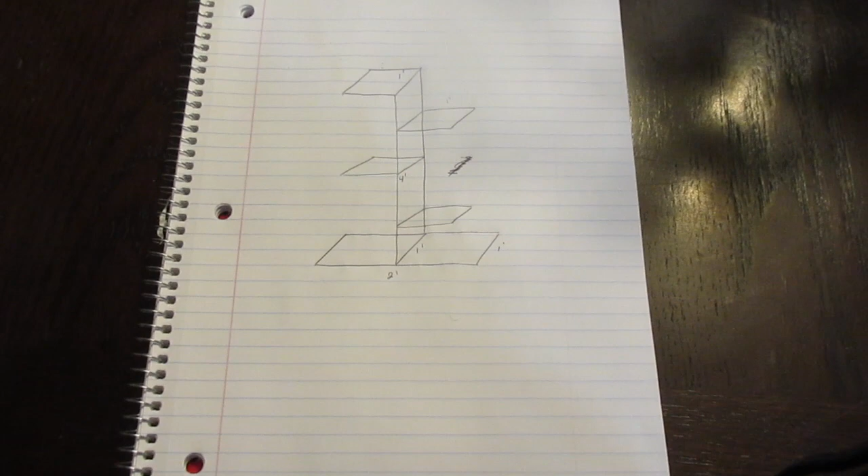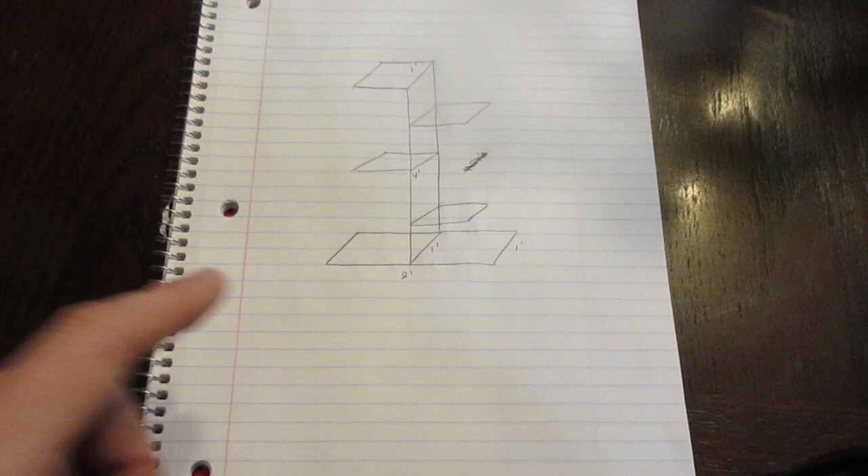But what we are going to do today is make a planter stand. Now I have some 1-inch tubing, 1-inch angle, and some cedar - I believe it's 8 feet. It's a 1x12 that's 8 feet long. So hopefully between all that, we should have enough of what we need.

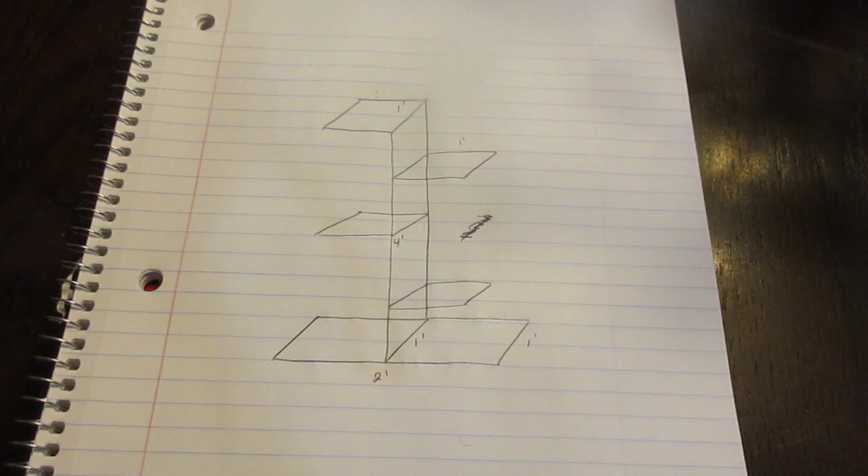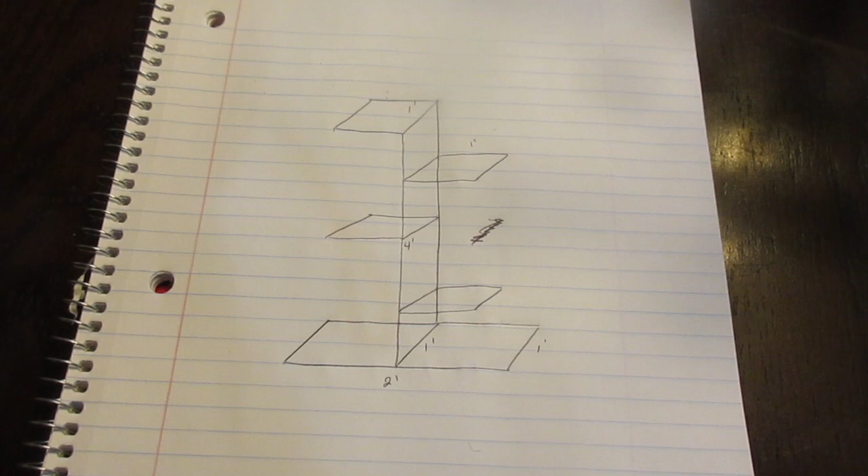So this is what my drawing is. I believe that in order to really get anything done like this, you do have to have a drawing, just because this is like my 3rd time drawing it - every time it seems to get a little different. It's mainly cost savings, bad to say, but it is. Originally there were going to be 2 posts that connect with one possibly in the center, but that literally doubled the amount of product and wood I was going to have to buy. This is kind of a surprise anyway, maybe it will go well, maybe it won't, I don't know. Distortion might become a real big problem the more complicated it gets, because once you start welding, distortion gets to be a little rough. But this is my plan.

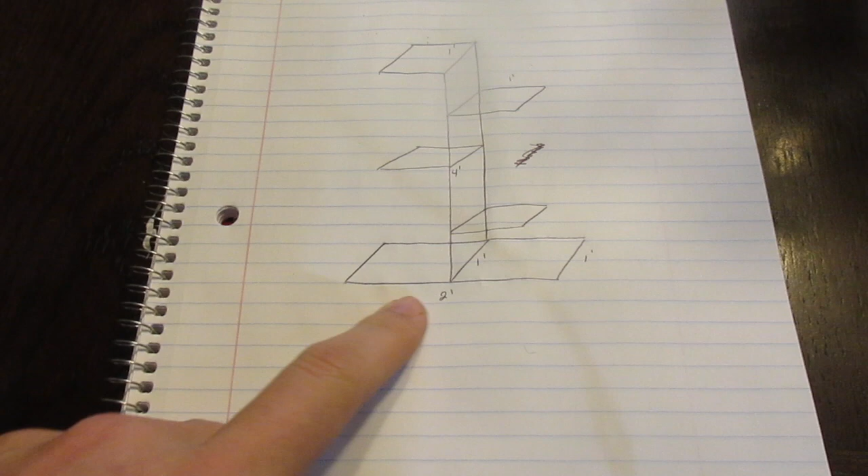On the bottom I have 1-inch tubing. It's 2 feet on both sides, 1 foot connecting, so it's basically a rectangle. And then that's going to be connected to a 4 foot by 1 foot rectangle, also made out of the same tubing.

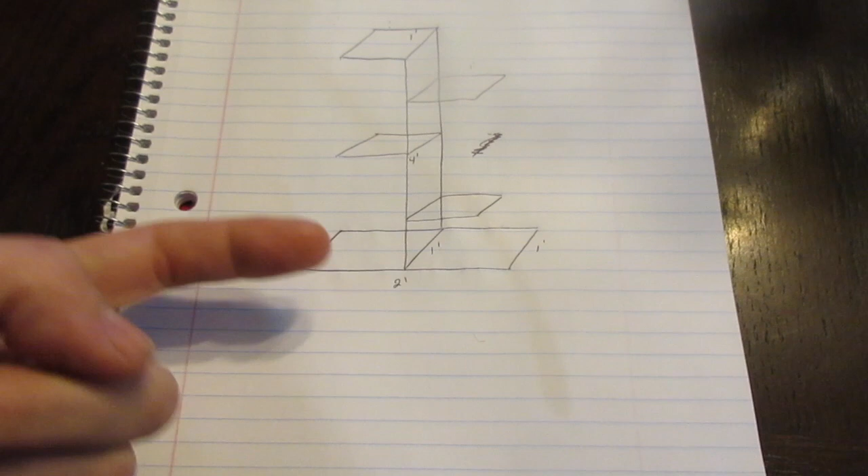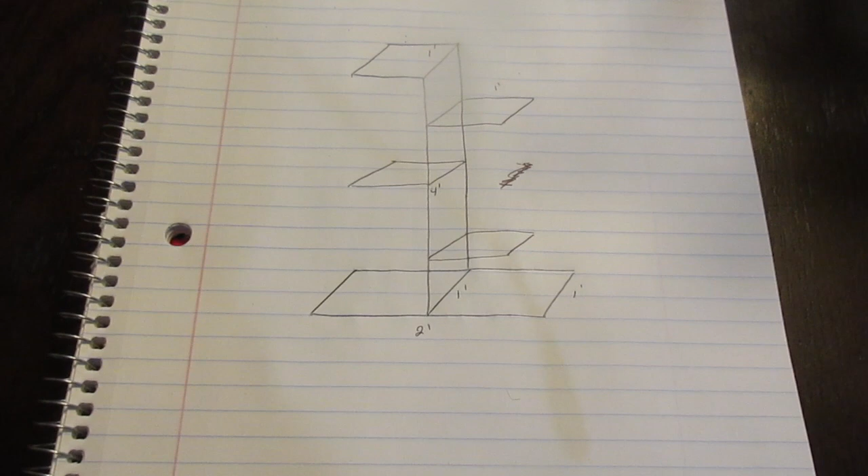That's just going to be welded directly on top of each other, so the piece of wood can - I'm not sure if I really want to put wood down here, to be honest, because I just don't really want to. But if I do, I'll have to put little feet on the bottom corners, maybe some rubber, who knows. I'll look at it once I get to that point. I have some extra 1-inch flat steel I can cut into little pieces and weld on the bottom, and they'll have a base for the wood to attach.

But so we have the basic shape. Now some of the plants here are a tad tall, and this is for Miss PNW, since she likes her plants.

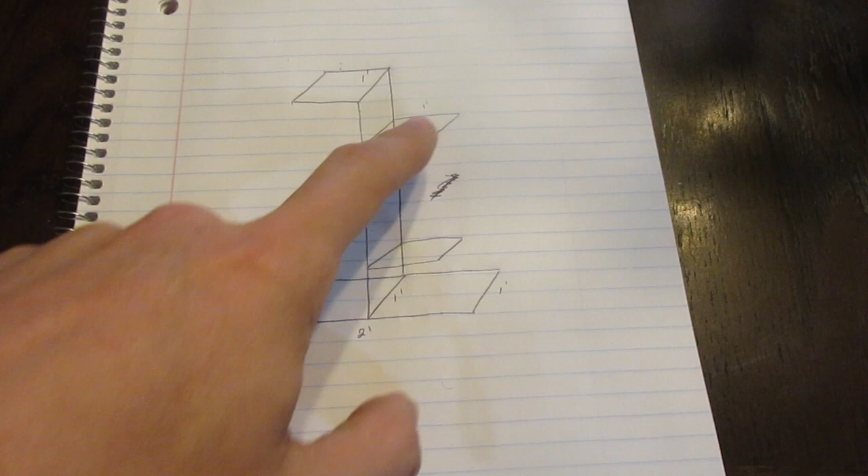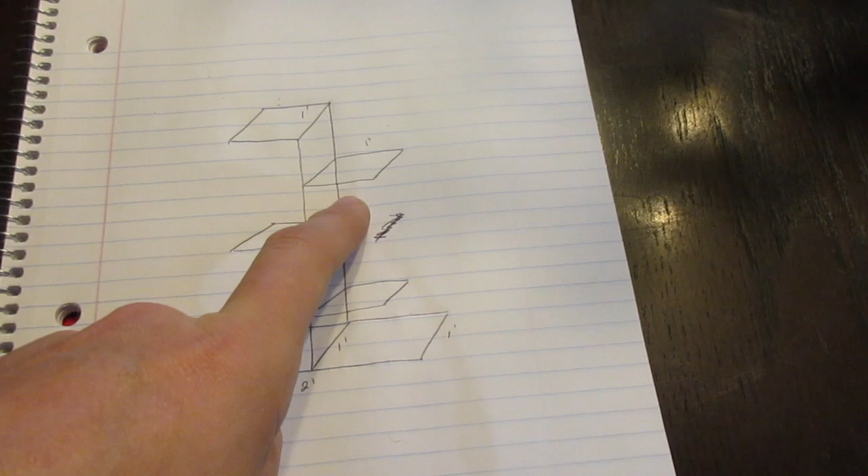So I didn't want to have really small sections, so I decided to stagger it. Originally I was going to have them on both sides with 8, but that would only really be good for a very select amount of plants. So now it's going to have 1 foot up, 1 foot outside, 1 foot on the side, 1 foot on the side - so that should be 1, 2, 3, 4 feet. Hopefully that should be good.

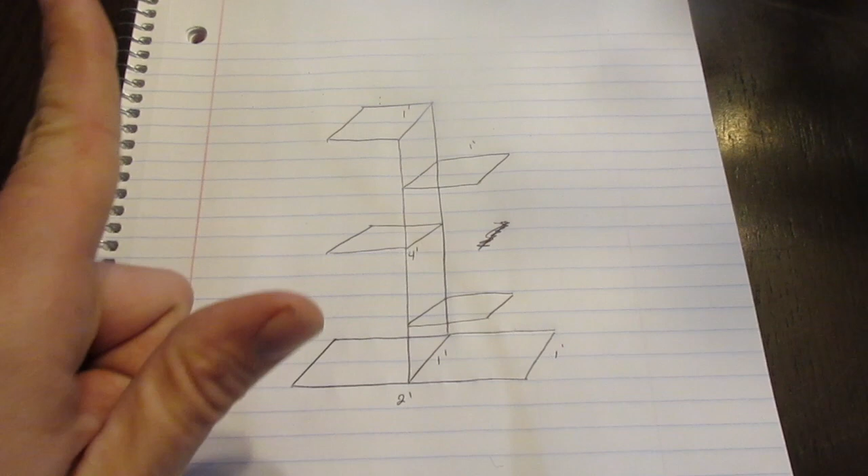And the top is just going to have one weld directly to the top. This hopefully will provide some stability. The actual shelves are just going to be angle iron with the angle facing down, so the wood will just rest on top of it. I might drill a hole in the center just to add 1 or 2 mounting screws to the wood.

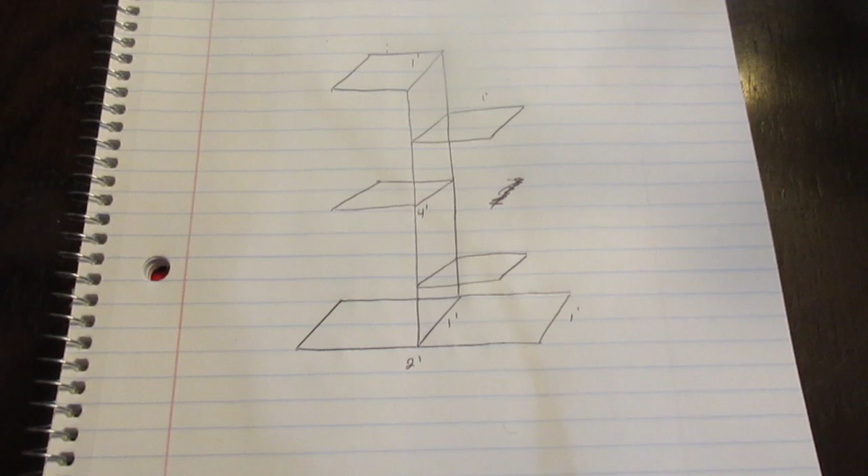I'm not 100% sure if I want to do that. Just to keep it clean, I would have to countersink it if I did. But like I said, we'll come to that point if we get to that point. But so that's about it. I bought a new chop saw, and I'm going to be cutting out all these.

So basically how this is going to work is this is going to be just a normal cut, and on the insides it's also just going to be a normal 90-degree cut - they're just going to be welded directly in. I kind of thought about angling them, that might look better. In fact, saying it out loud right now, I think I probably will just do a 45. Okay, you got me - so 45-degree cuts. See, this is why having a picture is always good to do, and talking it out. So 45-degree cuts all around, that way it's just a lot cleaner. And on this one, let's see here.

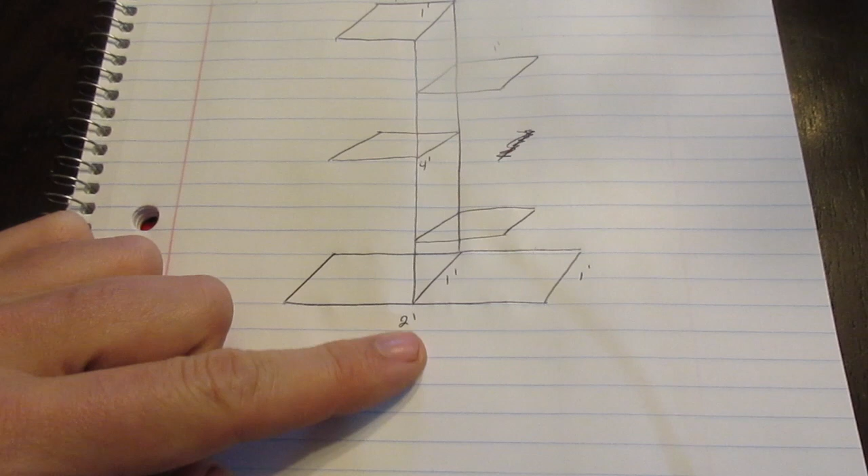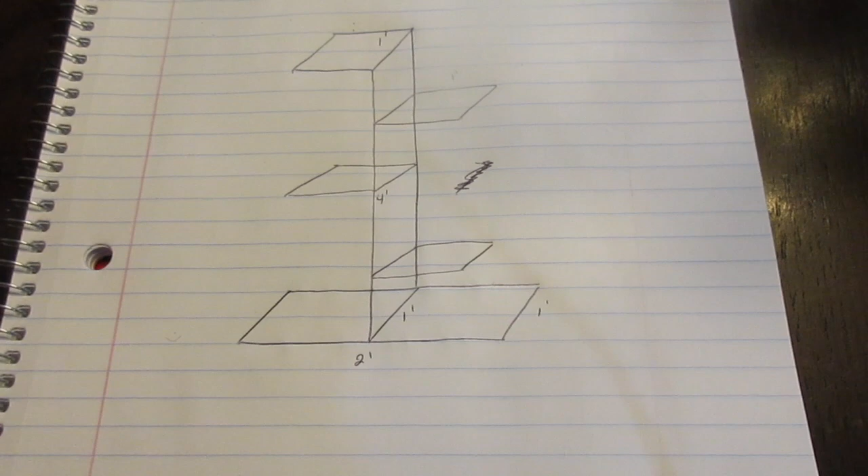This one I think I'm not going to attach. I might not even need this piece, to be honest. It's not like it's really there for rigidity, because if I didn't, I could just weld it directly on top. And it's not like making a 45-degree cut is hard, that's not my point. I'm just trying to see what would be best, because welding it directly on top might add a bit more stability than welding it to the side. But if I weld it to the side, I can have that as more of a base as well.

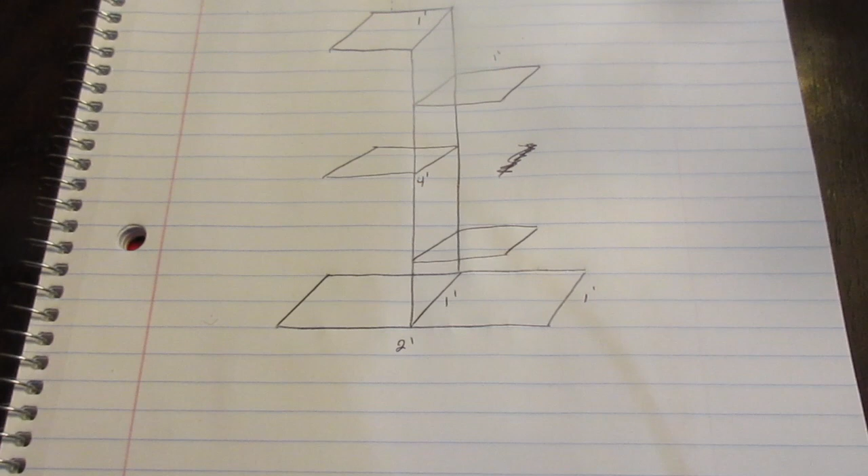But then these aren't 1 foot pieces. They still could, it just wouldn't really look as good. So, okay.

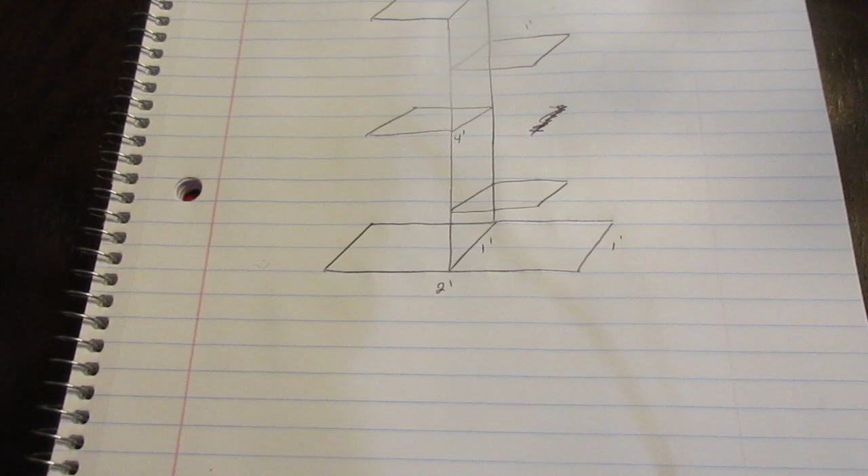I'll have to do some thinking, but my idea of how it's going to start is this. First, I need to make a whole lot of cuts, but I'm not going to touch the angle iron at all. First, I'm going to weld up and cut the base, that's going to be pretty easy. I believe it's a 6-foot section, so hopefully that should be enough for this whole bottom, and just weld it up. I'm probably not going to show the cutting since it's just cutting metal, but I'll put a couple videos of the welding part.

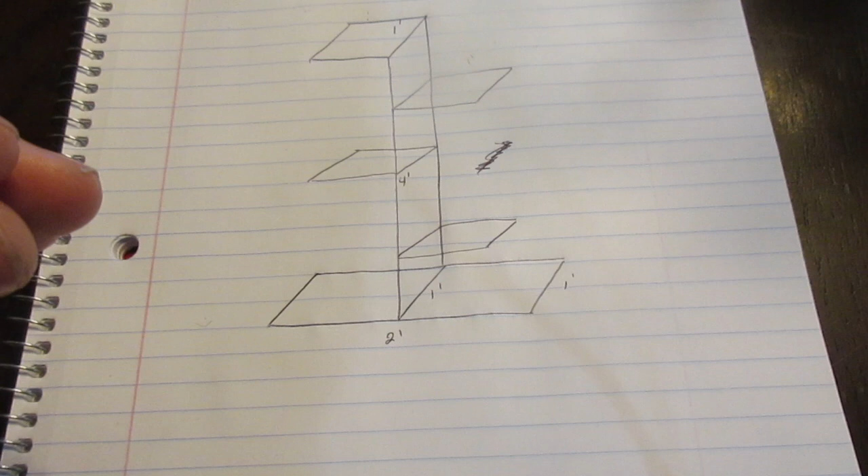Now I'm talking about distortion, because metal gets hot and expands, and then once it cools, it contracts. That process, I've noticed after doing research - granted, I'm not a welder - can cause a lot of warping, and I don't really want that. So a good way to counter that is apparently to weld on opposite ends, that way they can counteract each other.

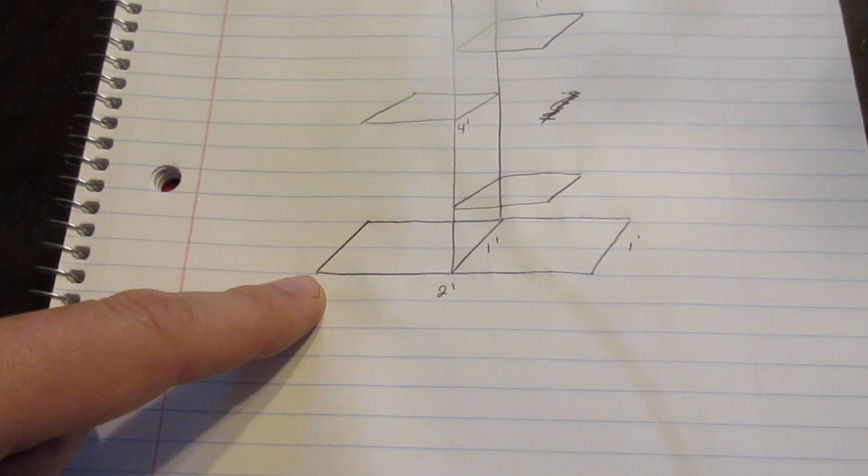So I'll probably weld on the top and the bottom on each side, and then if I feel like it's really necessary, I might do a weld on the inside. I don't think I'll do a weld on the outside, but if I do need to, I can, though that's probably going to result in cleanup or grinding. But if it's better for stability, then might as well, or if there's a big hole or gash that I need to fill, that's another reason I'd do that.

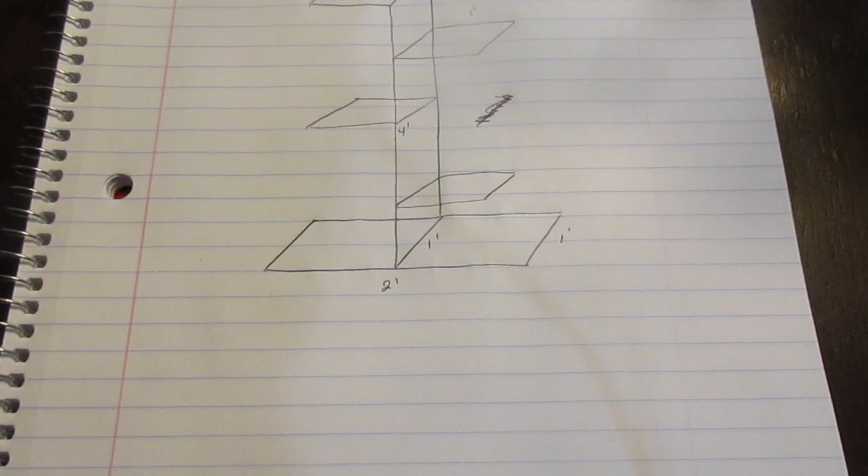So I'm going to go ahead and get this cut, get it cleaned. That's probably going to take a good section of an hour, and I'm barely ready. So I'm going to go ahead and do that, and then we will get this started.

So after getting everything welded at this angle, I cut a 45-degree, that way they can make little boxes. So I make 4 of them - that's 1, 2, 3, 4 groups here. And then that's going to go on the sides, but I'll show that later. So I'm just going to weld those up, bring it back.

Okay, so it is cut and cleaned, at least the bases. I have these little magnets on it to kind of hold it in place. I'm going to put a tack in the middle of each corner to make sure it's good to go, and do the same thing for each side so I could take off the metal magnets since they are a little hard to weld around. And I'll show you the final result.

Got everything welded, so now there's the base.

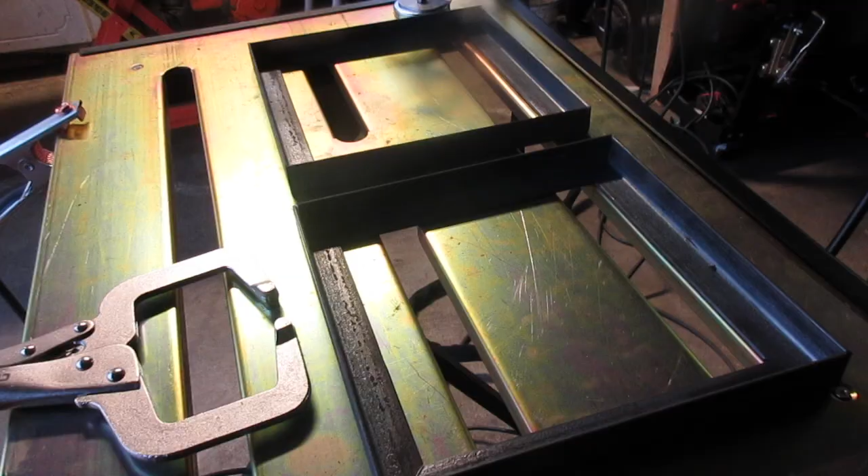Everything else - now I'm just trying to make a whole bunch of squares out of L. So I got the last 2 of them ready. I figured I might as well show.

So what I'm going to do is tack it first in the corners, opposite corners of each. I like to do it all at the same time just to prevent gas wasting. This particular machine has a fairly large unresettable post gas, so I try to do it as fast as possible. Sometimes I get it, sometimes I don't, but if I can save a little bit, I can. Anyway, everything's clean - I ground everything down on the bench wheel so the corners are tight.

So the plan - the first one I did, I used a 3/32 filler rod on one of them. I didn't really like it because it's too thick, so then I did a 1/16 filler rod. It was okay, but then the next one I used no filler rod, and it actually looks the best.

So that's what I'm going to be doing. It's not as strong of a weld, but it's going to be holding a plant, so I can't imagine it's going to be too heavy, especially these plants. They're pretty lightweight, not necessarily a jungle plant. So go ahead and get set up, and then we will get welding.

All prepped, got my gear on, gloves, helmet, gas is on, set about 12 CFH. I can turn it to 80 amps. It's a little loud, so beware. DC, nothing special, no pulse or anything. Let's do this.

It's the weekend now, so I have some time to work on this again. I got all 4 of those done, and I decided to change the plans. One is going to be on top, and 3 alternating on the sides. Just gonna clean up the weld a little bit, weld the top on, clean it up, and after that I should be ready for paint.

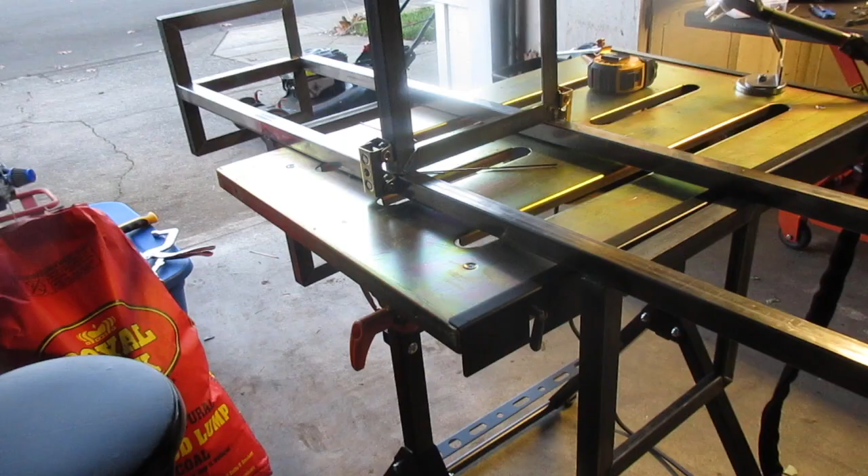I got 2 of them done. This is the last one. I'm only doing the sides and the bottom. I'm gonna check for strength, but it's gonna be a little hard to see the top, so I'm trying to avoid seeing the welds. So pretty sure it's doing pretty good, they're pretty solid. I might do the inside too, but let me go ahead and get this started.

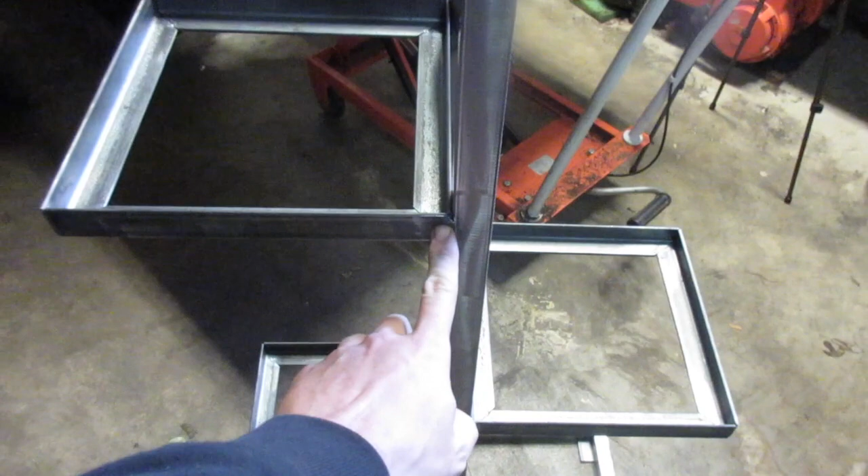All in all, I think the only thing that I can kind of see wrong here is I think it might be a tad warped like this. I don't know if that's from welding these on the sides and it being a little off. I'm not really sure, I don't think so. It could just be the actual base right here, or the supporting structure. But other than that, no, it's pretty good.

The wood I'm not going to show because I just want to show off the metal part of it. It's not that hard to stain wood, but it's going to be basically a fairly mild stain, and then some polyurethane on top of that to protect the wood. It's going to be out of cedar. Why cedar? Because I have it.

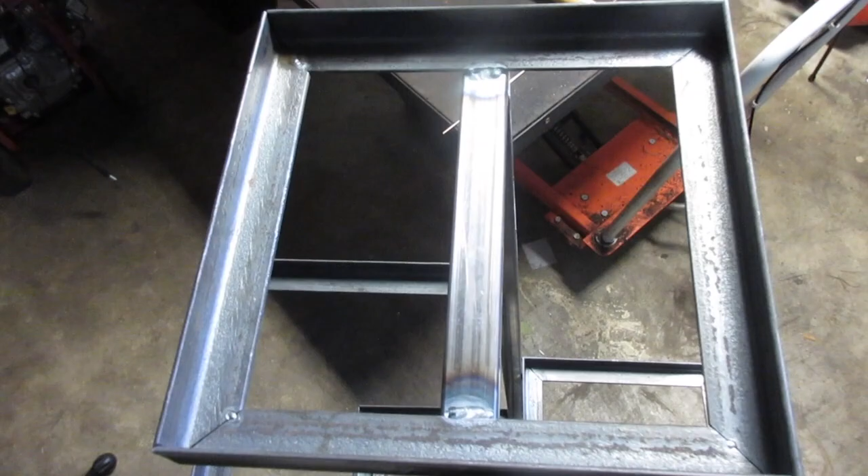But you can tell there's the first, second, third, and then the top one is done there. I apparently did not clean the surface of this one very well because there's this weird little nipple on there. But other than that, I think it's doing pretty good. Yeah, I'm pretty happy with it.

I think the hardest part is just the prep work of all the cuts. You would not believe the cuts on these types of things. All the times you end up watching YouTube channels and they end up making something look very simple and easy, and then you never quite see the behind the work. This is one of those additions to that category. It definitely was a pain.

All in all, it took me about maybe 4.5 hours because I had to set up my chop saw to allow a different type of angle. It's a big confusing reason why they put it that way, anyway, that's not the point. So after spending about a good half an hour reconfiguring the saw, the rest of it was pretty straightforward.

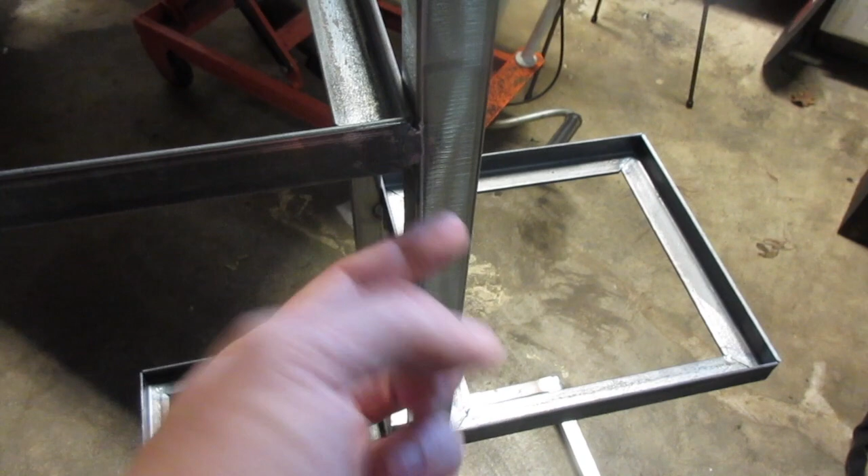The only thing I would say is save yourself the trouble and just make sure when you are welding these together that you really make sure they fit nicely, because if you don't, there will be a fairly significant gap. Luckily for me, the one gap I did have, you can't really tell because I welded that part to the actual structure. I put a weld on the bottom, shoved that in kind of, and a weld on the side. I ground the weld on the side down as much as I could to make it a little more even.

Because I am painting it, I want it to be as smooth as possible. I took a flapper disc and scraped off all the mill scale and everything I could from the actual structure to make sure it's as clean as possible. I didn't wipe the whole thing down with acetone, I just mainly used the wheel.

Then I'm going to paint it, primer first and then paint, whatever color you want to do. But other than that, I like it. I think it's a nice little addition.

Originally this one was going to be just like these, except on this side, but I like it. I think I like the idea of it being on top, and it adds a little more sturdiness once you actually have a plant on there, and you could put a pretty tall plant if you need to.